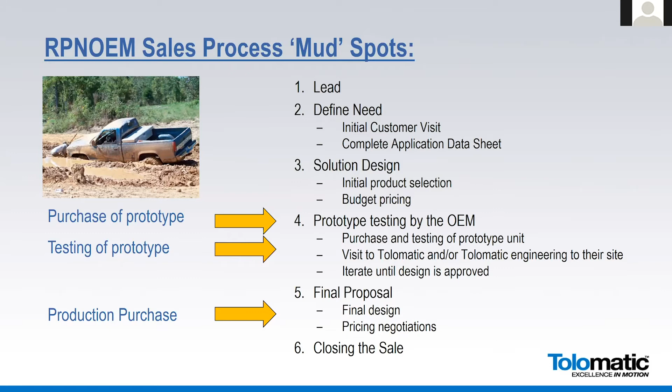So how do we get unstuck from those three different scenarios? Purchasing of that prototype. Here's a couple ideas, again trying to avoid that free prototype discussion.

A couple things we've done to tie off on that: I have a standing offer to the salespeople for a 50% discount on any prototype that we sell out in the marketplace. So if you can find a true RPNOEM and you can get in front of them and convince them to buy a prototype, I will give you a 50% discount on that one or two units for that prototype application.

So bring your regional sales manager into that account, show them the opportunity to work through that design cycle, engage their engineering team. That's what would qualify.

Now, I ask the distributors not to mark that up significantly. This is just a message to the customer that we're asking them to invest something and we're going to invest something. We're not trying to make profit off of this prototype. We're trying to just cover costs so that we're basically equal on this endeavor.

So I'd ask that you exercise restraint on this, and then the regional sales manager will be the one that makes the final determination on if it's a true RPNOEM opportunity or not for this prototype discount.

The other thing we've done in some cases is offer extended terms for that trial. The guy says, well, what if it doesn't work? I'm not sure about this. My manager—we might have the money, but it's tight.

We've offered 90-day terms, buy and try, right? So you buy it, you try it. Now you have to define what the application parameters are, but here's what you're asking it to do. Here's the motion profile we've generated out of our sizing software. If you do this with our product, that's what it will do. So that oftentimes helps a customer feel a lot more confident about your solution.

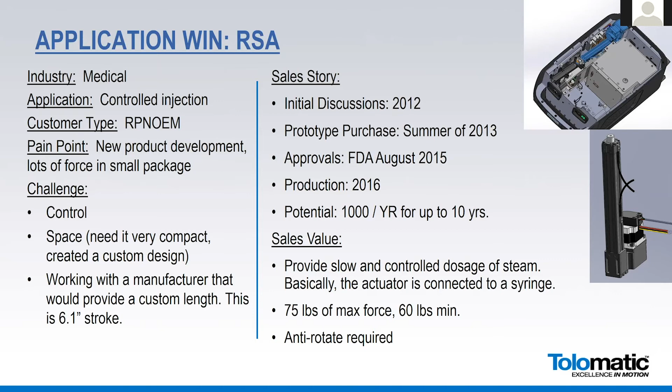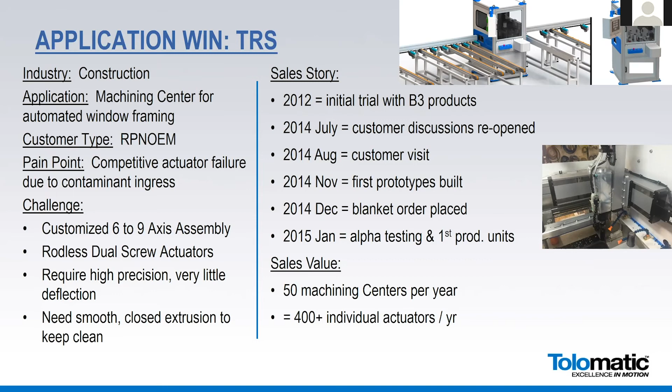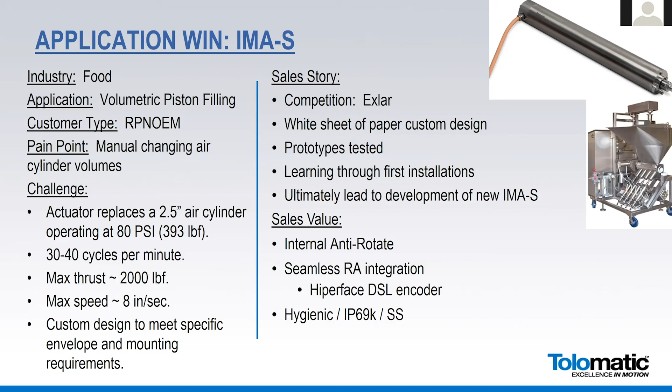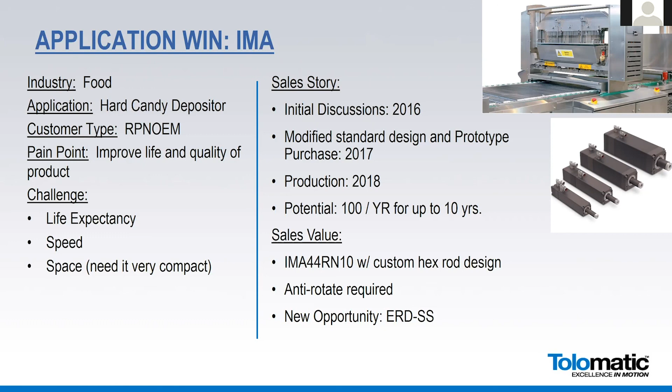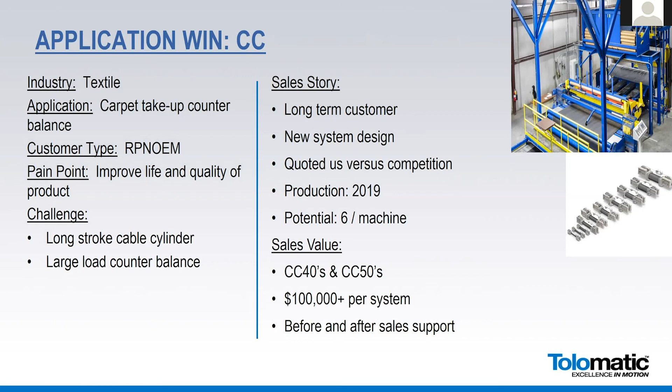It's 6 units per machine, but these are big cable cylinders with a high dollar value. So it's a pretty exciting application for one of our legacy pneumatic products.